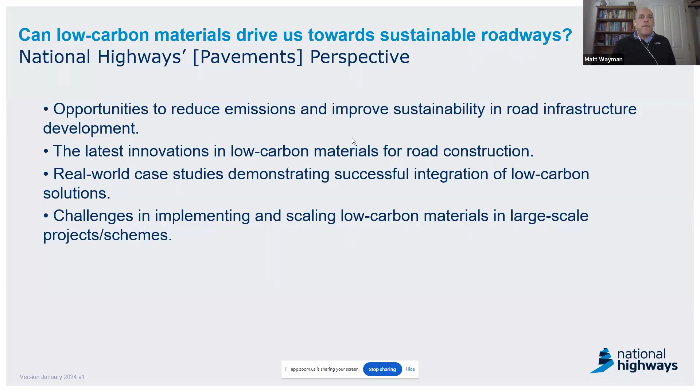And then finally, some of the challenges that we come up against in bringing low carbon materials and other innovations to the network, and how they would become routine use in the future. So that would be, from our point of view, actually including them within a specification for road construction on the SRN. So pretty much once they go into the specification, they could be used anywhere without further question. So that's the kind of goal or end point for any innovation, and you'll see the process by how we get there over the next few slides.

So to give you a bit of context for innovation towards sustainability within National Highways, we've got strategies around net zero, and also a bit more recently resilient highways. Our plans for net zero highways were first published 4 years ago, October 2021, and the image in the bottom left here set the overall strategy and how we would achieve net zero highways with a series of stage gates. It's called the 2030, 40, 50 plan. 2030 is net zero for our corporate emissions, and that's our corporate operations. So the travel that we undertake for the company, the fuels that we use in the buildings, etc.

2040 is the target for construction and maintenance to be net zero, and then 2050 is for all the people running on the network to be net zero. So that would be a full switch to alternative non-combustible fuels, basically. So electric vehicles and other powertrains by 2050, which is probably quite an ambitious target, but also it's kind of out of our hands; we can do things to facilitate that, but other government policy will actually bring us to that point.

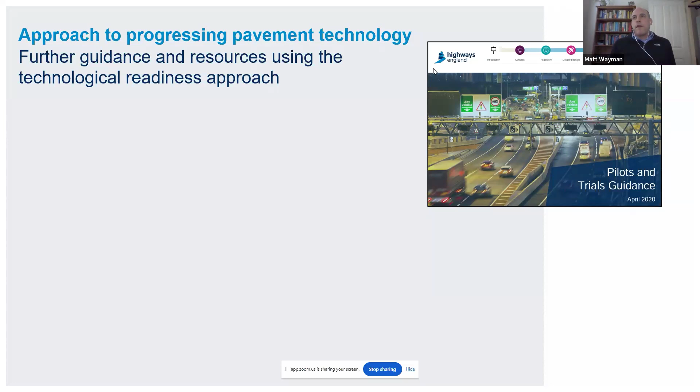Okay, so approaching pavement technology and how we progress that, we've got a few resources that I'll touch on in the rest of the presentation. But if you were considering putting an innovation onto the network, there's a few guidance documents that will enable you to do that. So if we were going to trial something on the network, we'd look at pilots and trials guidance to actually put that down. So that's all about following it through from the concept of the idea to actually implementing it on the network and mitigating the risks there through that process. So that is one published document.

And then specifically for pavements, if we were going to take a pavement innovation, we would probably refer to this protocol for innovative paving materials. Quite a lot of them are waste derived, so it's got a bit of focus on that. But it's a very helpful document that considers all the elements of bringing along an innovation.

And the key part of it is using a comparator material to compare your innovation to. So we would use an established material that we use routinely now as a base point, or like a control, if you like, and then we would look at the innovation against that comparator and how it performs against that. So either technically, environmentally, in terms of safety, for example. So that's quite a useful document for the task in hand.

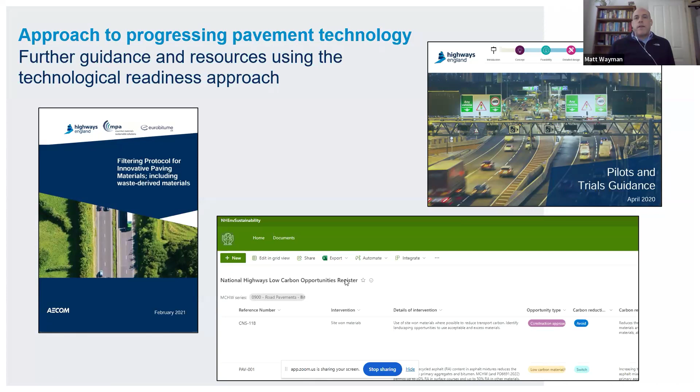And then the final one, so for low carbon opportunities, they're all recorded within a register, and this is available to our supply chain, and it could be made available to anyone.

You just have to request access. So you can see all the low carbon innovations that we're looking at across all assets. You can filter those down. You can also submit ideas for new innovations as well, so that we've got it on our radar. And you'll get an idea of how progressed any given innovation is.

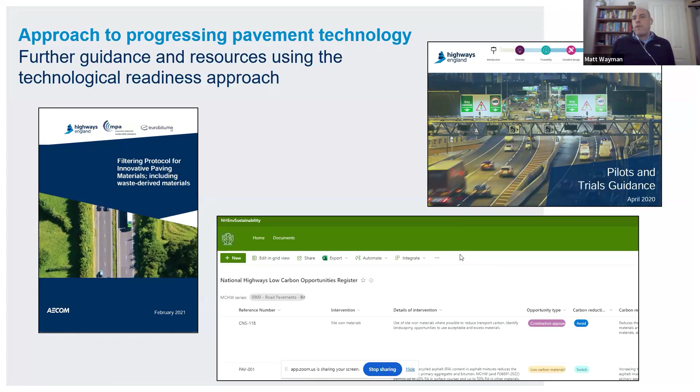So is its technological readiness ready to go, or are we in a stage where we're trialing it? So you'd see the visibility of that. So it's also a good tool so that you don't submit the same idea as someone previously and we're already looking at it. So there's another useful resource.

Okay, so how do we sort of approach innovation? We tend to take a technological readiness approach to it, and this table is an adaptation of a standard technological readiness level approach that's been adapted for pavement materials specifically. So you can see top to bottom progressing through the TRL levels, and then an idea of what we would get to by each stage. And then these are the specific pavement type considerations that we would go through.

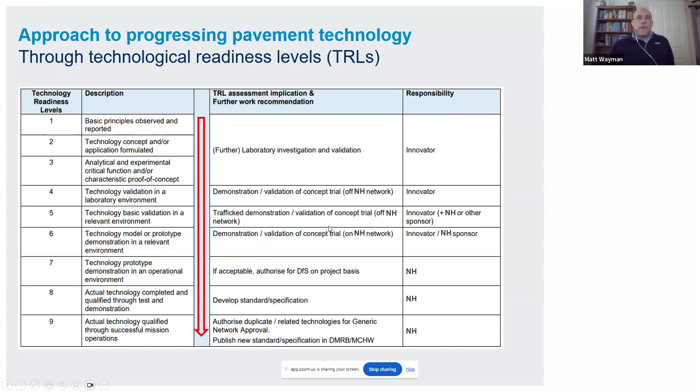So there's a few animations. So stages 1 to 6 are sort of like when an innovation is in its initial concept, if you like. Now that might be facilitated by one of our accelerator programs, for example, led by the innovations team, or it might be working with universities to bring that to TRL level 6, for example. And a lot of the focus is on the innovator bringing it up to that stage, and then we get involved a little bit later.

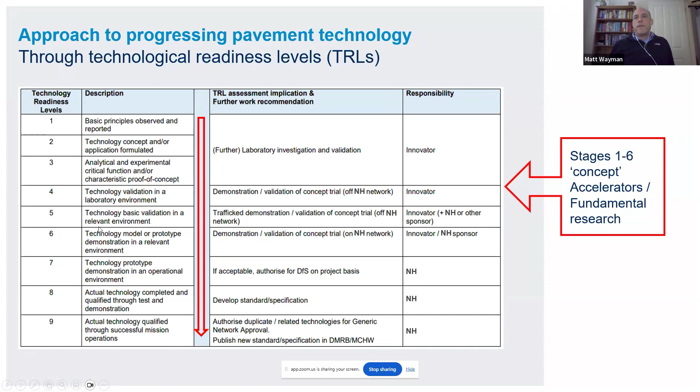So when it's a bit closer to network, we can offer the technical advice on specific innovations when it gets to level 5, 6, for example. So then once we've passed that stage, we're at a point where we could actually put it on the network. And the way that we do that is by departing from an already published specification, say for asphalt on the network. So we in our team would grant the departure for that use.

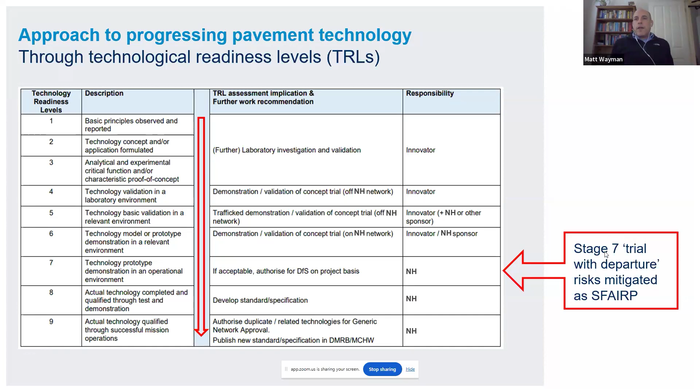And the process is actually using a risk-based approach, and this is an acronym for so far as reasonably practicable, or so far as is reasonably practicable. So we want to get it as safe as possible before it even touches the network. So it's a risk-based approach. So by that stage, if you've got your departure, then it could be laid on the network in a trial site, and then it would be subject to future monitoring after that.

But something that I'll come on to is that we often get stuck at this stage. So we've got a trial material on the network, but getting to the next stage where we actually write it into a specification for routine use is the tricky part. And a lot of that's driven by: we can see it on the network, we can see it performing, but we don't really know how long it's going to last.

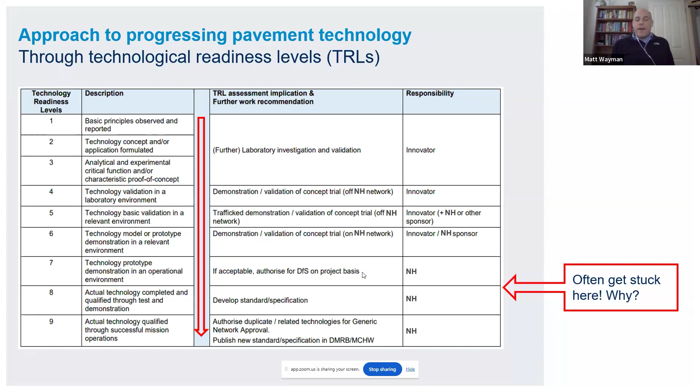And that's one of the big problems that we have with any pavement material, because even a surface course, for example, is expected to last 12 years, maybe more. So it's okay now, but what about in the future? That's a research question that often remains unanswered, but perhaps I'll talk about that a bit more later. So those are the general approaches to innovation, progressing through the technological readiness levels.

Now, what about opportunities to reduce emissions in road materials, pavement materials, and specifically asphalt, which is by far the most predominant material that we use on the network. And the remit for that falls squarely with us in the pavements team. So we've done quite a lot of life cycle assessment, carbon footprinting. Here's one example of a carbon footprint that follows the first 5 stages of the standard framework for life cycle assessment, so the EN 15804 standard.

So what we did is run, this is for one mixture, a thin surface course mixture. The clause in the specification is 942, and you can either use a straight run bitumen for that product or a polymer modified. For the polymer modified, it would be slightly different numbers, but not too different. But anyway, you can get an idea of where the emissions arise in production of that material and laying it on the network.

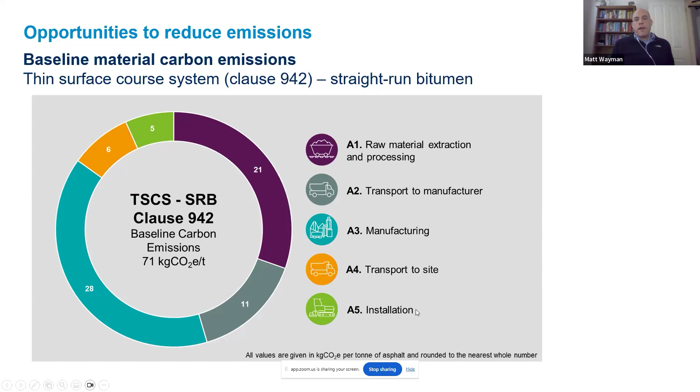So where are the opportunities? Well, they're in the production and they're in the material stage. We're also addressing these smaller portions. The transport is largely taken care of by separate initiatives to change the power trains on HGVs, etc. Some of these installation, well, fuel substitutions on site away from diesel to run the pavers and the rollers on alternative fuels. So yeah, they're smaller contributors, but they're not being ignored, for example.

So that was one carbon footprint. There's obviously a carbon footprint for other materials. The one that we just looked at was the clause 942 down in the bottom right here. Sorry, it was actually the one in the purple box, so straight run bitumen. And you can see the overall contribution to that on the network of all the asphalt types that we put down. The others are polymer modified, thin surface course, clause 929, where that's used for the structural layers below the surface. And then hot rolled asphalt is a further surface course option, but it only contributes a relatively small amount.

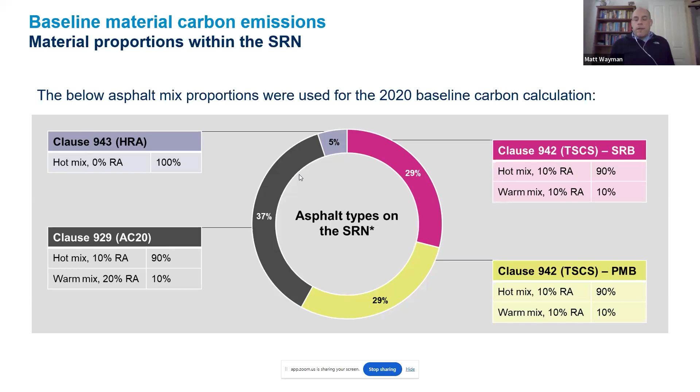So yes, this was all part of the road mapping exercise. So if you've looked up that publication, the asphalt roadmap, you'd see this exercise in there. And this is all about us getting a handle on where the emissions come from and the contribution that they make to the network overall. So what I'm really trying to say with these three slides is we know where the emissions are coming from. What can we do to bring these big proportions down? And that's really the focus of our efforts.

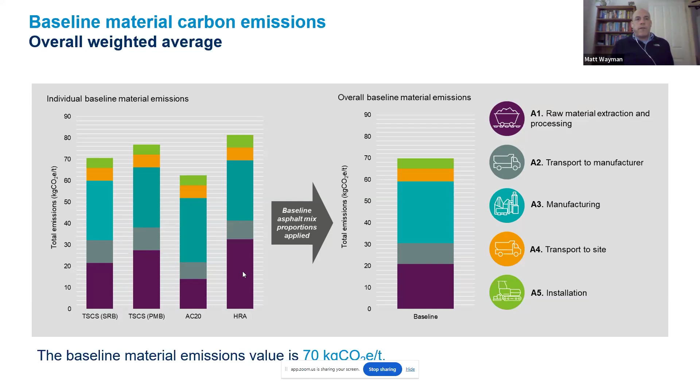And taking a step back, these turquoise bars, the plant contributions to the mixture, the fuel use at the asphalt plants, the supply chain has to make that decision to switch fuels there. We can only influence that by setting targets on overall carbon footprints for asphalt, but where we can really make a difference is in trying to find solutions for the raw material inputs and facilitating new materials that could be used there, which have lower emissions.

So further ideas for opportunities of where we can make a difference. Well, I talked about the fuel switching at the asphalt plant. We could reduce that requirement for fuel a little bit by mixing the asphalt at lower temperatures. And we've brought in warm mix in large proportions on the network, and that is ever increasing. What else can we do? Well, we can make more use of recycled asphalt. It's fully recyclable, so the aim is to try and get higher proportions of recycled material in.

Transport emissions I've touched on. The big hitter, the embodied carbon of bitumen, and you'll see from the case studies we've made quite a focus on trying to reduce that by substituting the crude product with other things, optimizing transport in haulage, construction plant emissions, looking at things like switching away from diesel on the sites, and a small but not insignificant contribution is actually trying to reduce the moisture content of the materials that go into the asphalt plant. Obviously, you have to drive that moisture off as steam to get to the asphalt product. So getting rid of that water is worthwhile.

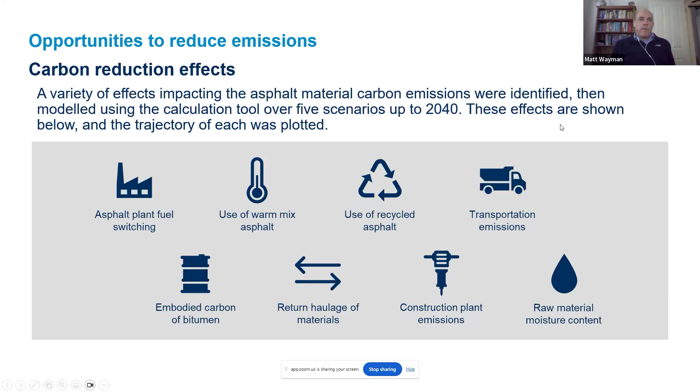So all of these things have been put into a waterfall of where we might get to by 2040. At the moment, we're not getting to net zero, but we're hoping that further innovations will come along to fill that gap. Things that we focus on up until 2030, well, the warm mix, the recycled content, better asset management decisions such as preventative maintenance and using longer life materials.

And then beyond 2030, well, we'll hopefully see the industry switching fuels at plants and a fuller adoption of what we call biobinders instead of the bitumen products that are used for asphalt at the moment. So it would be either a full or partial substitution to what we call biobinders, and I've got lots more detail on that in a bit.

So from the carbon footprinting exercise, we were able to put a trajectory of emissions reductions. If we bring everything on stream, we'll get to a point, and there's still potential for more. I think our target is to get below 10% of the emissions, and the rest we might have the option to offset at the end, but that's an option of last resort.

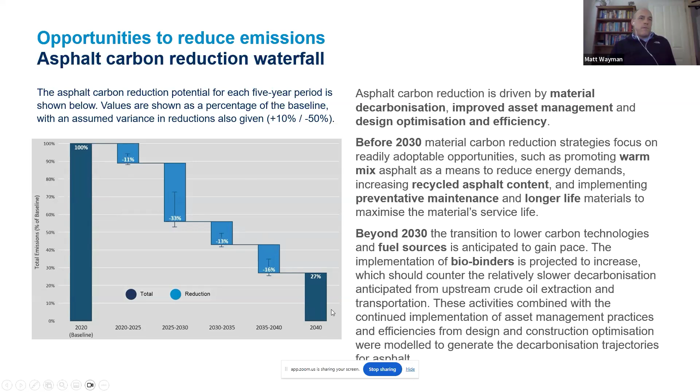Okay, so just to recap, where have I got to so far? Talked about the net zero highways plans and the detailed plans for the materials, the key materials, so concrete, steel and asphalt. I've given you a few screenshots of what was in those roadmaps so far.

What I'm going to talk about next is these two boxes. So the actual future asphalt net zero program. So we're looking at specific innovations, trialing them on the network, and lots of different technologies, trying to work out which is best. We also had a net zero concept scheme where we threw everything at one scheme to see how far we could go relative to the 2020 baseline. And we managed to achieve 70% reductions in emissions on one site that was laid at the end of last year. So that's kind of where we got to, and I'll give you more detail on both of those shortly.

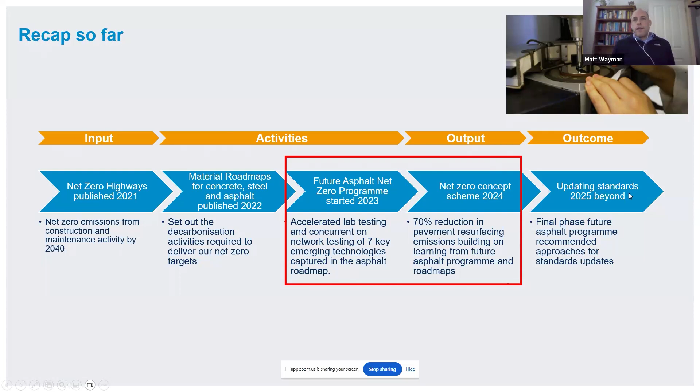And then what are we doing beyond this? Well, the aim is to update the specifications to include these innovations once we've proven them enough, so that they just become routine use. Okay, so on to the specifics. So case studies. I'm going to talk about two in some detail, but this is just to give you an idea of some of the ones that we've got on the network at the moment.

So we've got a couple of biobinder trials. There's one up in Cumbria and one down in the southwest. I'll go into those in more detail, specifically the A30 scheme that was down near Exeter. Longer life binders, so trying to basically keep materials in the pavement for longer, particularly the surface course, giving it extra life. There are some fairly innovative products around longer life polymer modified bitumens that could enable us to do that. So we've got a few sites that have laid those types of materials for future monitoring.

And then the other innovation that we've looked at in quite a lot of detail is including more recycled content in surface course materials on the network. So going up to 50% recycled content, whereas the standard at the moment is between about 10 and 20%. So trying to encourage a lot more recycling, and we're really trying to assess whether that gives us the durability that we need in those materials, having included the recycled content. So there's a few things that are on the network.

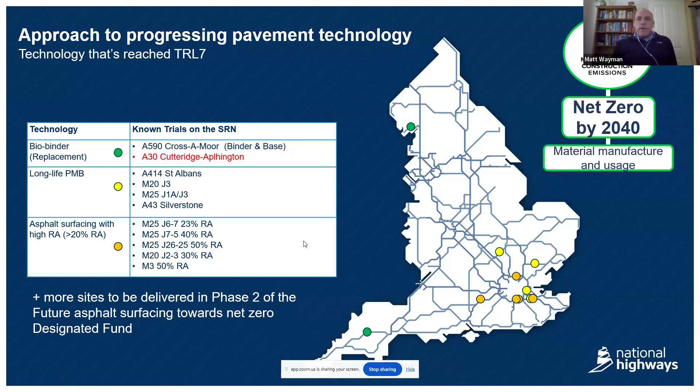Right, so I'm going to talk about biobinders specifically, so those that we used on the A30 trial in particular. So biobinders are about substituting out some of the crude derived bitumen, and can that gap be filled by another product? And we think it can, and those are bio-derived components. So effectively plants that have grown in their lifetime, they've taken up carbon dioxide that's locked into the structure of the

plant or the biomaterial. That's harvested and then put into the pavement as these oils or more solid components, replacing some of the bitumen, and then it's locked into the pavement structure, so that carbon dioxide is not going to be released as it would do if the plant just broke down organically and returned to soil, for example. So we're actually taking the plant, locking it into the pavement, that locks in the carbon as well. So it's a type of sequestration, if you like.

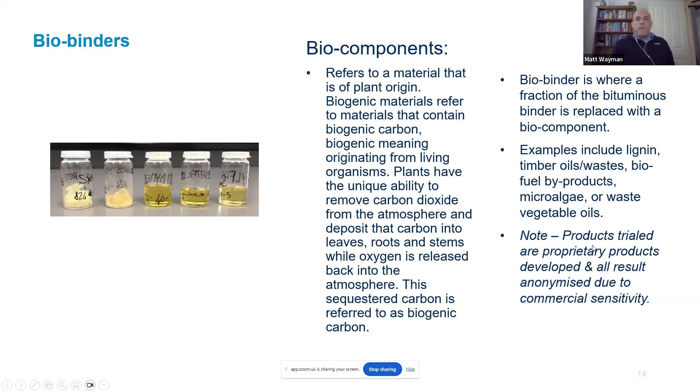So yeah, we replace a fraction of the bituminous binder, and some of the examples that we've looked at are lignin, timber oils, even microalgae and waste vegetable oils. And the ones that I'm going to talk about are proprietary, so I won't name the actual names, but you'll get a good idea of how they perform going forwards. Yeah, that's just a few more examples of proposed biobinders. So wood sources, pig manure, waste cooking oil. Some of the more promising ones are crude tall oil derivatives from, I think that's from pine trees, but that's the huge range of different options that we've got there.

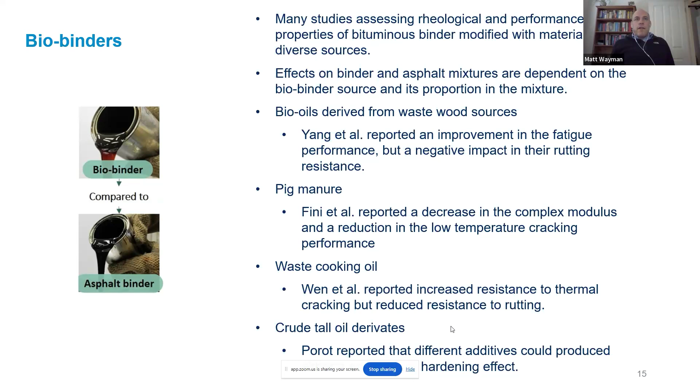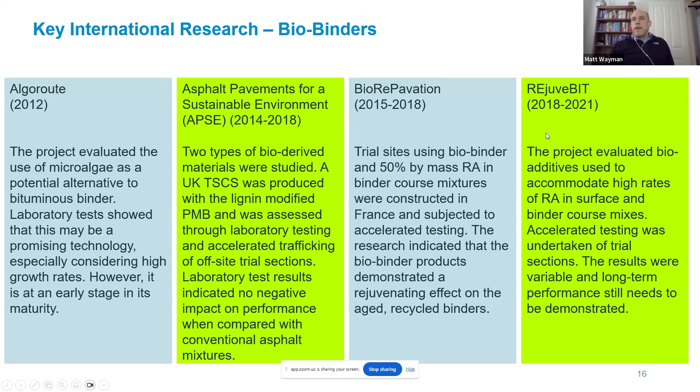And it's not brand new research. This has been looked at in big research consortia led by Europe, for example, over the past decade or so. There's just a summary of a few projects that have explored this concept thus far, sort of giving us a base to work off in our own trials, for example. So yeah, a few big projects there that have looked at this concept already.

Okay, so I'll go into detail on one. I've got two case studies, and this was the first one that we looked at biobinders in a lot of detail and actually put it into the surface course on the network, which you can see in the image up in the top right there. So what did we do? So we took our most commonly used thin surface course system, and we trialed two products, a Shell product and a Nynas product.

There's not that many bitumen suppliers in the UK. There's about 3 or 4. So 2 of the big hitters have got these types of products already. So we put them into a surface course, and we put a control section of more conventional material for direct comparison of the performance of the novel pavement against going forwards.

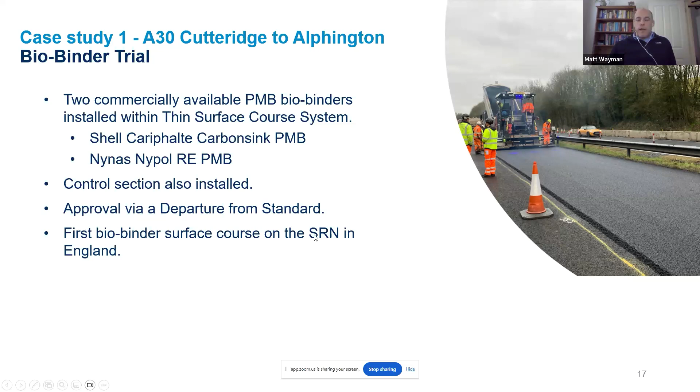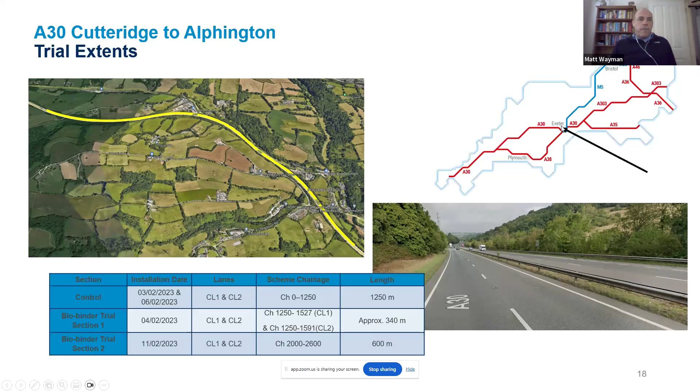And this was done through a departure from standard. And this was the first one that we put onto the strategic road network in England. You can see where that is. As I mentioned, it's down near Exeter on the A30. Specific references to the location there.

And this involved quite a lot of collaboration. So ourselves working with the 2 bitumen suppliers, Heidelberg Materials, they were the contractor and the material producer. And then Nottingham University did a lot of the subsequent testing of the asphalt materials, and our consultants helping us out were AtkinsRéalis for these trials.

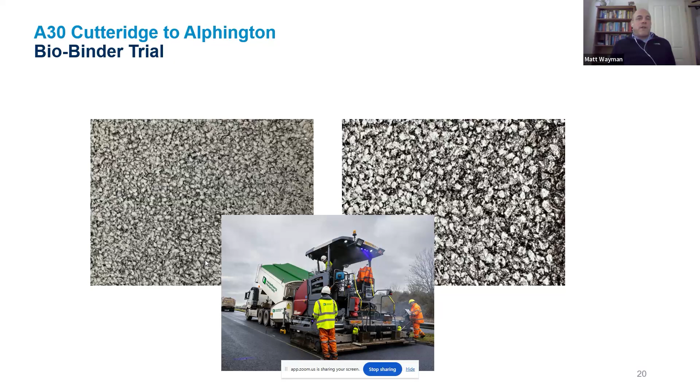So it went through a number of steps in about 3 months. So designing the trial, the departure, installing the material and sampling it subsequently for further testing. The slide doesn't really show much, but it's actually a comparison of the novel surface against the conventional one. One's a bit in higher exposure, but they look quite similar, so no concerns there.

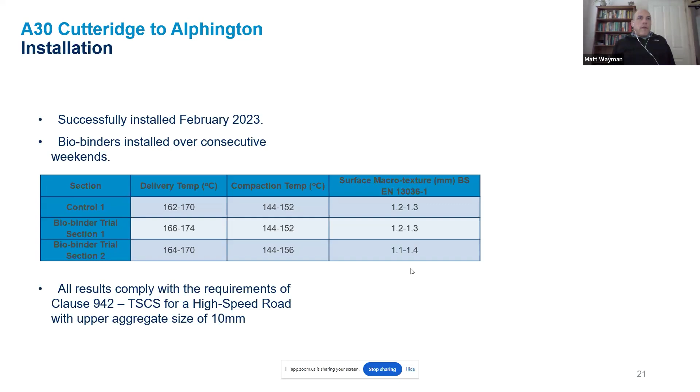So that was installed, and this is just to give you an idea of all the monitoring that we undertake on such a novel material. So there's testing at the laboratory, there's testing at the asphalt plant, and then we also conduct field monitoring of the sections that have been installed by our routine surveys that already run across the network.

So testing: we've got a conventional binder, we've got the novel binder, and then we would put it through this suite of tests, scale 1. So that's just the binder versus the binder, not in the asphalt. And then we put the binder in the asphalt mixture and test that through another series of tests, looking at different properties of that asphalt material. And then the final step is the field monitoring, whether it's on the network. We run our survey vehicles and check its performance annually. So those are the types of tests that happen.

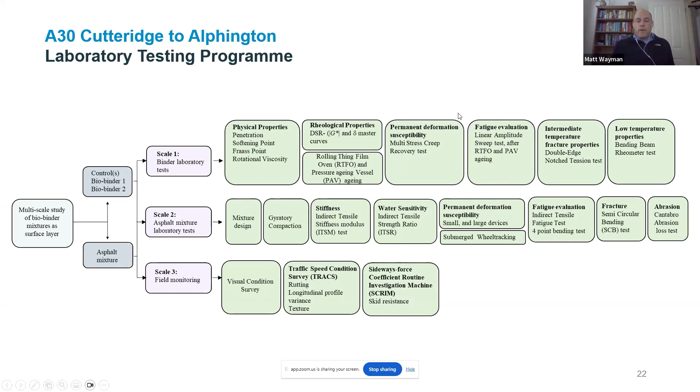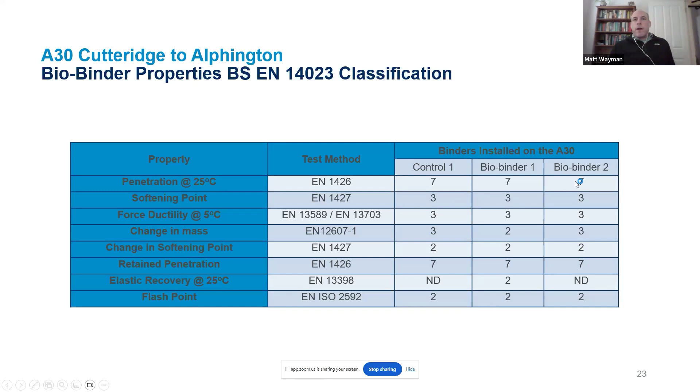This is just comparing the 3 binders. So the control conventional binder, the crude derived binder, versus the 2 different biobinders. You probably can't get much from this, but this is a suite of tests that binders are put through as part of a European norm. So we test all those properties, and you can see that they're very similar despite the biocomponents being in them.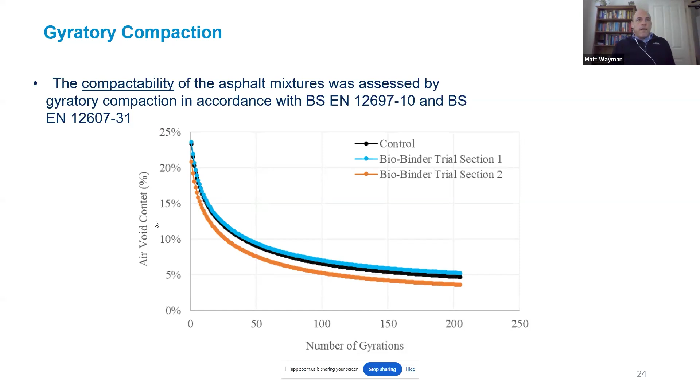And then some of the tests on the asphalt mixture: we test the compactability of the material. You can see the control versus the biobinders here. No real concerns here. One compacts a bit better, but all in the same sort of ballpark. So the idea behind these tests is that the voids in the asphalt are within a specific range, and it basically should be dense enough to withstand future trafficking. So that's the idea behind this particular test.

And then we'd also subject the asphalt mixture to, for example, wheel tracking tests, which is basically a test that tests the susceptibility of the material to rutting. So when vehicles are driving across the asphalt, is there going to be a dip created in the wheel tracks? What's the susceptibility of the material to that happening?

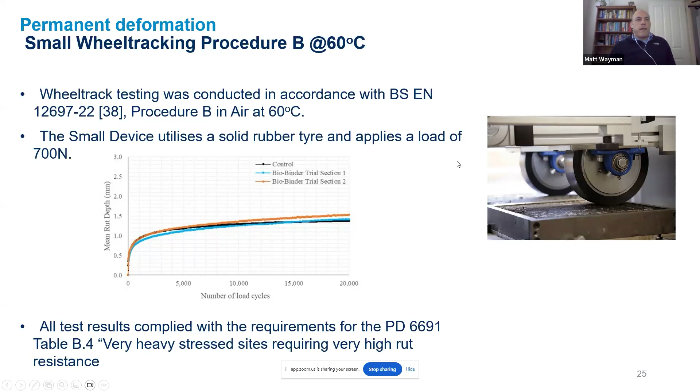So there are laboratory tests that approximate that happening by applying a load across the material and running it back and forth. And then after a certain number of passes, you get to measure the rut depth and see whether that's satisfactory or not. But they both were capable of being installed in very heavily stressed sites. So that was a good outcome.

And then one of the other tests is all about the tensile strength of the material. And that's actually tested before and after being put in water for a period of time. So what's the relative strength of the material before and after it's been submerged in water for a certain amount of time? And then you get a ratio of the tensile strength as a result of that.

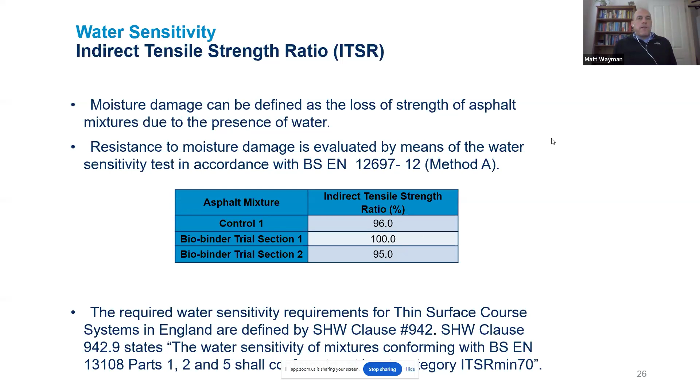And we look for more than 70%, where it's actually 80% for warm mixtures that are more in routine use now. And you can see that the strength ratio was satisfactory or very satisfactory on that front as well. And then finally, for that trial site, we did a carbon footprint calculation.

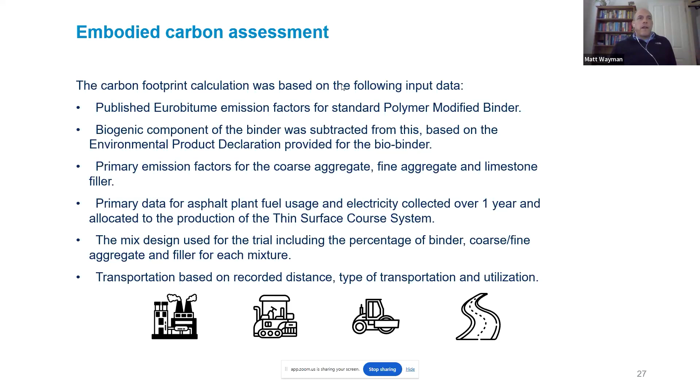This is all following the same standard approach that we produced the pie charts from, that I showed you right at the beginning of the presentation. So how much carbon did we save relative to a normal thin surface course?

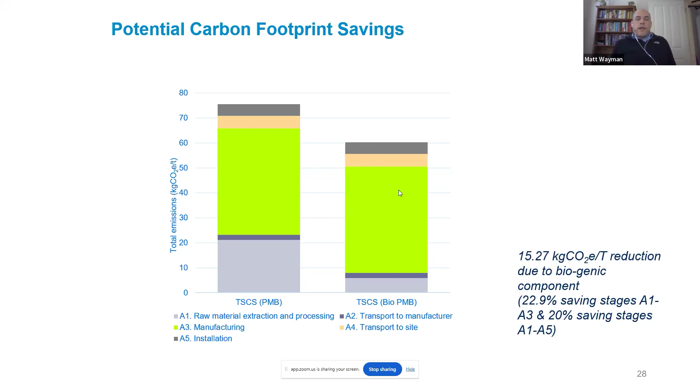About 22% by making this binder substitution, and the substitution was between about 10 and 20% of the crude product. So there's potential to substitute more, but that was a good level to explore to start with. And yeah, the carbon footprint was brought down by close to a quarter by the initial attempt of us to use this type of material and keep everything else the same, which is quite critical in a trial.

So that was the first case study. That was the first initiative under the Future Asphalt surface course project. And it was exploring one particular innovation, which was biobinders. But we've also got a long list, if you like, of other innovations to test.

And in the past year, we've actually taken forward trials relating to the longer life binder products, graphene additives, higher reclaimed asphalt, and the use of what we call biorejuvenators, which actually facilitate higher recycled contents in asphalt by restoring some of the aged binder properties to something that's less aged and therefore likely to perform better in a fresh asphalt course, despite the recycled content being in there.

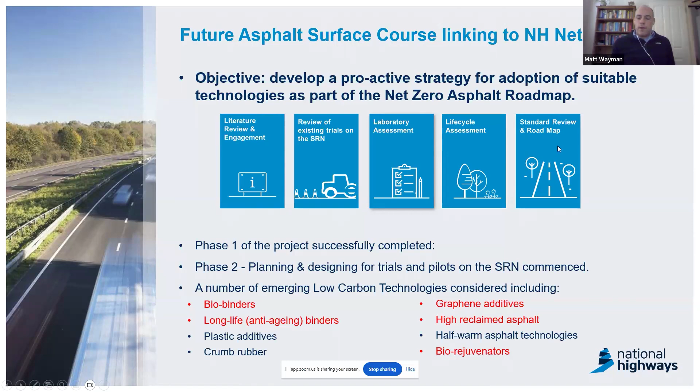So we're following a staged process of filtering the innovations, the laboratory testing, the life cycle assessment, and how on earth do we get these into the specifications, which is about a year or two down the line.

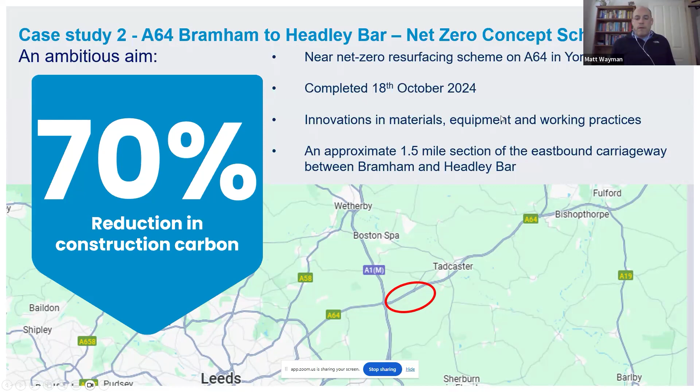Okay, and then a bit less detail on the second case study, but this was the one where we threw all of the innovations we could think of to see how far we could go and install that on the network. So this one was up near Leeds, somewhere near Bramham, on the A64, completed at the end of last year. And by doing everything we could, working with Tarmac, we managed to get a 70% reduction in emissions relative to the baseline for this particular site.

And as I said, we threw everything we could at it at the moment. So the materials that were used on this site were warm mixed with a biobinder included. And we also increased the recycled content up to about 40% here, and also put the long life bitumen products in at the same time.

So you can see that if we're going to get anywhere near the 2040 net zero target, we have to start stacking all these innovations together and seeing how they work together. And this particular surface course has got all these different things in it together, so we can hopefully see how they all interact and whether they're compatible.

So those were the material innovations. And then the equipment, well, the diesel was swapped out for either electricity in the rollers that we used on site, or hydrogenated vegetable oil. So that made a small contribution.

In terms of the working methods, well, they were facilitated by actually closing the site and not trying to do resurfacing just at overnight intervals. So by having full control over the site, we're able to implement different paving technologies to, for example, eliminate joints in the surface. And joints are a source of weakness in the pavement.

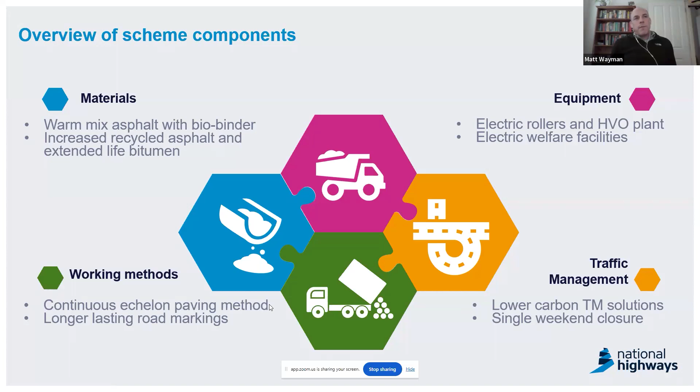And also what that paving operation allowed was actually to focus on obtaining a smoother surface. And there's some benefits in doing that specifically as well. So they actually contribute to in-service benefits of the pavement if it's laid smoother.

So by using the echelon paving method, smoother surface, and that was verified by what we call the International Roughness Index. So before the works, the pavement had bumps in it that contributed to a roughness of 2.1 meters per kilometer. So that was reduced to 1.4 after the works.

Now, if you have a vehicle traversing that surface with a less bumpy ride, it's actually going to have improved fuel consumption, and we're able to basically work out what the saving would be in the year after resurfacing, using a particular model for smoothness and how that's attributed to fuel consumption. So that was one benefit from laying the pavement smoother.

And there's also some evidence that suggests that pavement surfaces that are installed smoother last longer. It's quite an old study, but it's kind of logical as well that laying it smoother, you get less dynamic loading across the pavement, and therefore the pavement structure will remain integral for longer, basically. So that was a potential finding as well.

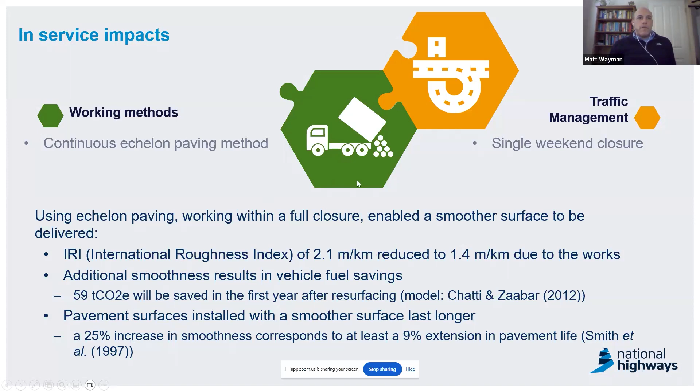Okay, and then I'm coming quite near to the end now. So, challenges in implementing and scaling low carbon opportunities. Well, as I alluded to with the TRL levels before, we get to level 7, we get a material installed on a site on the network, which gets us to TRL 7.

And then quite often what happens is it stays there for a long time, and it doesn't become routinely specified. And that's because of our concerns about the long-term durability of the product. So we can look at it after it's been installed. Okay, it looks all right, but what about in 10 or 12 years' time? How is it going to perform?

So partly we have to take some risks here, but obviously those risks are quite high profile. If the material fails on the network, then there's lots of bad publicity for us. So we have to mitigate that to a certain extent. Basically, we just have to be confident enough in the material to allow it to be used routinely.

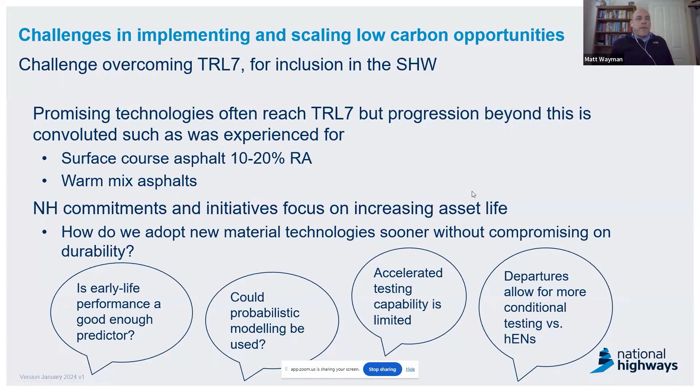Okay, so final slide, just to conclude, what have we covered? Well, opportunities to reduce emissions and improve sustainability, they're outlined in our strategies, so have a look at those. And there's guidance that sits alongside them to assist the actual progression of innovations through the technological readiness levels.

So hopefully that's helpful. The latest innovations that we're looking at target all aspects of the life cycle of a road material in order to reduce carbon. So you could look at any of those life cycle stages. We need savings across the board. And obviously I highlighted the big hitters in the life cycle for asphalt at the beginning.

I've given you an insight into two of many potential case studies where we've demonstrated successful integration of low carbon solutions. The ones we looked at today were the A30, the first biobinder trial on the network, and then the A64, where we tried to get as close to net zero as possible and got to about 70% carbon reductions.

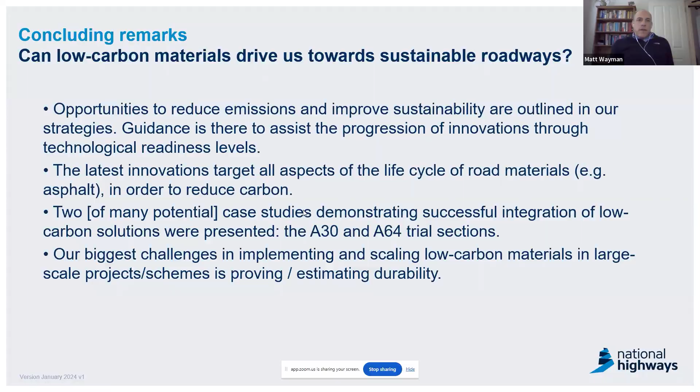We have a few questions in the chat. And the first question, which I also had and you also mentioned, is about the longevity of the low carbon materials. You mentioned that this is a research question that remains unanswered. So the question that comes from Phil: how long will these new materials last? And thus, could they make transport infrastructure less resilient?

Yes, there's always the risk that they might last a little bit less. I think, on to the resilience question, yes, effectively that would make the network less resilient. So yes, there's a risk that they will be less durable, and that is the big question, probably the biggest question, about when we get to the point when we're confident enough that the materials will perform as good as those on the network already.

And yeah, the suite of testing that we saw is extensive, and that's aimed to mitigate that risk as far as possible. So I don't know if I've really answered the question, but that is the big question that we try to answer every day, really. How long is it going to last on the network?